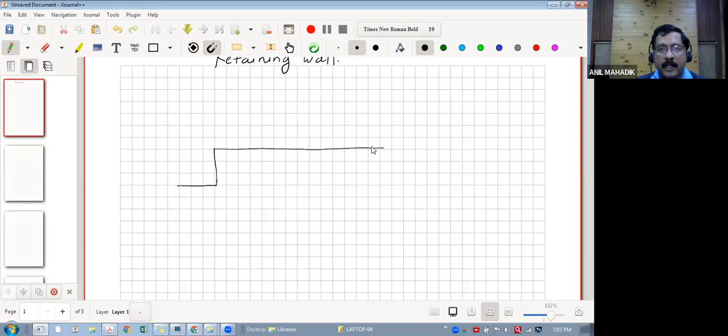Sometimes, let's say this is your road level, and it may be possible that your ground level is like this. So let's say this is your ground level, and the road level is here below. And here we are having one, let's say, building like this, for example - building or any structure, it may be industrial structure or RCC building. Such kind of situation may be there, and here this soil should not go fall down on the road area. So in that case, we will provide retaining wall here like this.

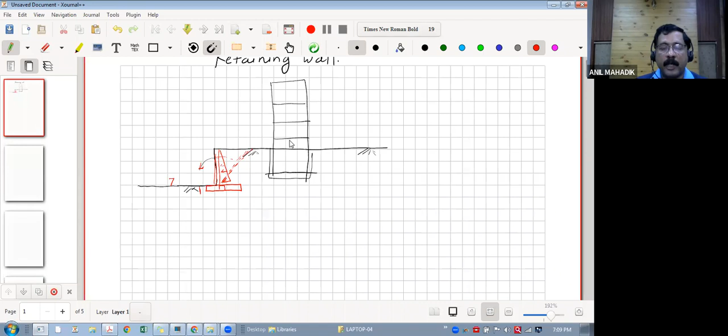So this is the reason why we provide a retaining wall. This retaining wall may be required when, say, the road level is different and the building ground level is different, or it may be something if you want to create one channel.

Underground channels are there, where the water may flow, or it may be a nala. Let's say this is your ground level, and this is, let's say, nala. Then this will be your retaining wall. So we will provide retaining wall like this. This is your retaining wall, and this soil over here, this is open area. So this soil pressure will have pressure on this wall. So functionally, you require such kind of level difference.

So when there is a level difference of the natural ground levels or finished ground levels, you want ground level over here and ground level over here. Therefore, there is a difference between the ground levels, and due to that, this soil may fall down. Okay, so this is the area. Any other example where we require retaining walls?

On hilly roads. Yeah, hilly roads, right? So generally hilly roads. If you look at this retaining wall, this is a cantilever type of retaining wall, we call it as cantilever retaining wall.

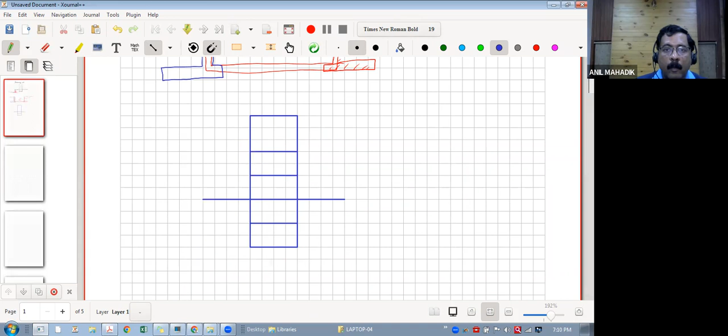Then second case may be in high-rise buildings, we may require basements. Let's say like this. So let's say this is your ground level and this is your underground basement, B1, B2, let's say. So that means this soil may fall down into this basement area, and we don't want that, and therefore we will provide a retaining wall here, right?

So the retaining wall will be like this, and definitely a base slab will be there. So this is a vertical retaining wall. Now this retaining wall is having support actually. Here, there is a slab over here, so it will offer a propping action or support in this direction. This slab will also have a support here, and as this slab is there, there will be fixity.

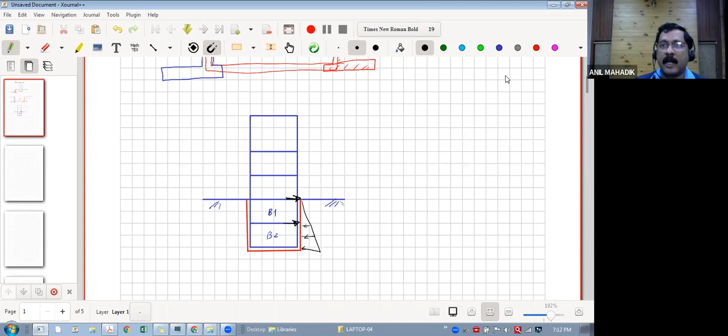So there is a lateral pressure like this, and due to this lateral pressure, there will be a bending moment. It will be something like this. So this kind of retaining wall we call a propped cantilever. Prop means there is a support at the top. It is a free cantilever - there is no support here, so it will behave like a cantilever in this case. If it tries to bend, it will bend like this, since it is a free end. Now here the end is not free because there is a support due to this slab, so we call it a propped cantilever retaining wall.

So such kinds of retaining walls are there, and cantilever retaining wall is, we can say, the fundamental or classical retaining wall concept. If you understand this, then you can apply it anywhere. In propped cantilever walls or basement walls, the only difference is in the analysis - the bending moment diagrams are different, but the design procedure is the same, and drawing and detailing is also based on the conceptual things.

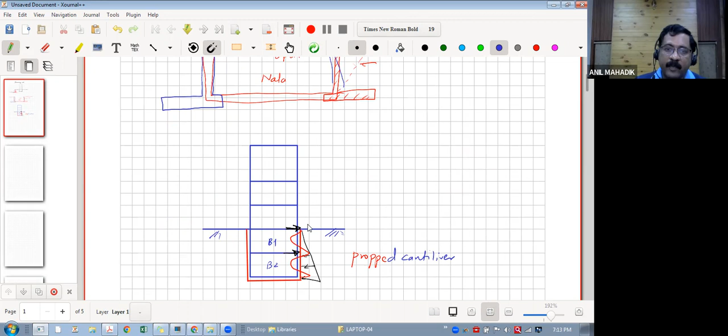So today we will learn the cantilever retaining wall analysis and design using manual calculation, so that you will understand the concepts, load path, IS code clauses, how to calculate AST and so on. Okay, so this is the way.

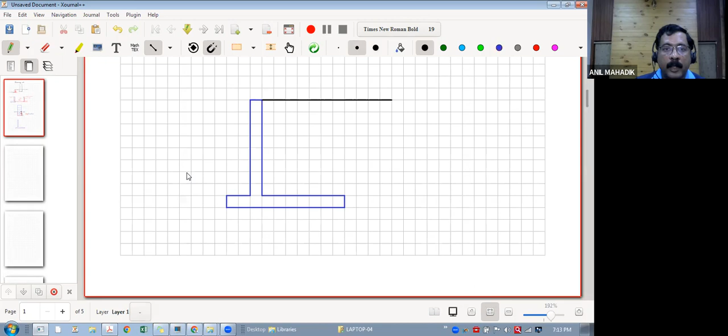And as far as the behavior is concerned, let's try to understand the behavior of a cantilever retaining wall. You should know the terms also regarding this. Let's say there is a retaining wall here, and let's say we are having some portion. So the ground level is here, and this is also your ground level. Due to this soil, there will be lateral pressure over here. So generally we call this vertical wall as a stem, and this portion we call it as the heel.

And this is your toe. Okay, these are the three terms.

Due to this soil, there will be lateral pressure like this. Soil pressure is like this, lateral triangular pressure, more at the base and zero at the top, as it is a cantilever. And due to this pressure, and due to vertical load of the soil and self-weight of the heel and toe, there will be upward pressure also, bearing pressure, similar to footings.

Upward pressure on the heel and toe slab, or bottom slab, or bottom raft, we can call it. So these are the loads acting on the retaining wall.

One is the lateral soil pressure, which is acting on the stem vertical wall. And due to vertical loads of the soil and self-weight, there is an upward pressure, upward bearing pressure, we can say.

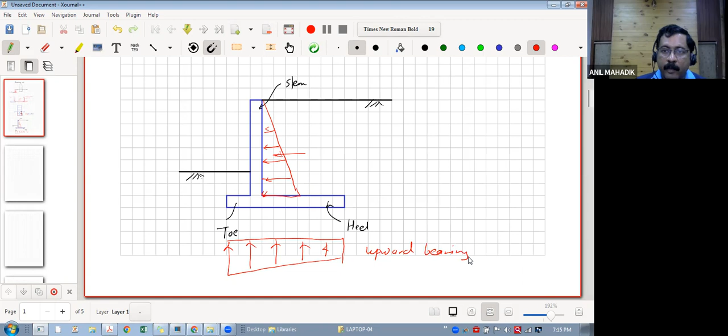Now, due to this, you understand this is a cantilever action, so the wall will try to bend like this. So you should understand the deflected shape of any structure under loads, then you can understand the behavior and tension and compression face. So this is your bending.

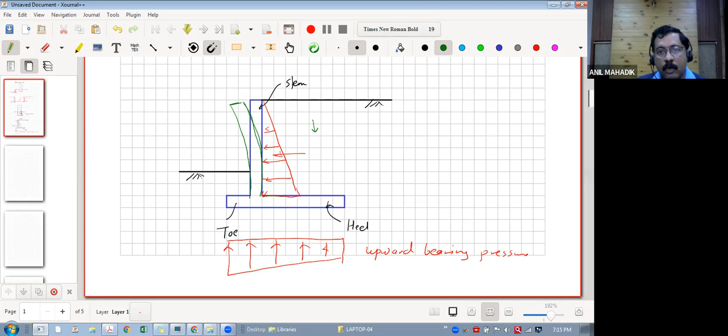Now, generally this soil mass is heavy, or we can say having more downward pressure. So due to that, actually, this will also bend like this. So it will bend also like this. So this is bending like this, this is bending like this.

Now this upward pressure is more, so this toe will bend like this. Okay, getting this deflected shape?

Due to this downward pressure, this will deflect or bend like this. And due to this upward pressure, this toe will deflect upward, because this upward pressure is more in this case. So it will bend upward, and this downward pressure is more in this case. So this heel will bend like this, and this lateral pressure is more, so this stem will bend like this.

And therefore there will be cracks here. So that means this is a tension face. Then there will be a crack here like this, so there is tension at the top. And here there is a crack here, so there is tension at the bottom.

So if you see the reinforcement, then I can say the main reinforcement is here for the toe region. And for the heel, the top will be the main reinforcement, because the bottom is in compression. And in the stem, this vertical line will have tension main steel, and the other side will have distribution steel. So are you getting the overall behavior of the cantilever retaining wall?

Yes, sir. Once you understand, then we will just see the process of design. It is as per the books actually. So the main important part in structural engineering is to understand the behavior only.

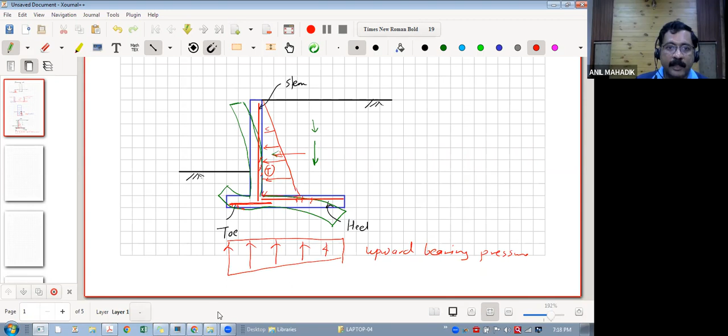Now we are taking one example similar to this only, whatever I discussed. So let's take this example only. Here is the example, and see, this height is 3 meters.

So the known part is, say, given is this. In reality, if there is a road level here and building ground level over here, so this height is 3 meters, which we know, and we don't know anything regarding this. So whenever we design the retaining wall, only the retention height is known; other things are not known.

For example, if you see this, so only I know this height. And this height is 3 meters in our case, and this is our problem. Now we want to design the retaining wall, so we need to decide this width.

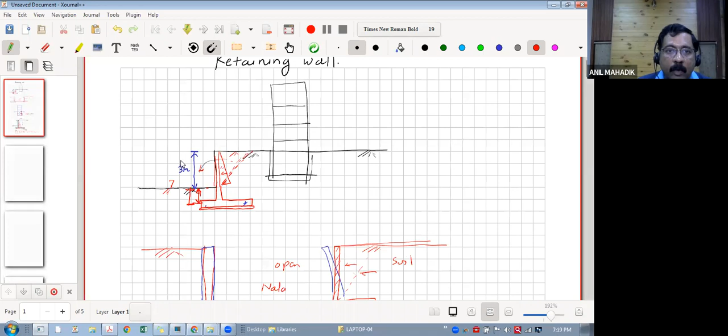Then, we cannot put the retaining wall exactly on the ground level. So generally, whenever we put any foundation, it is below the ground. Sufficient depth is there, let's say. So it should go a little down, then it will have like this. So there is a minimum depth of foundation here, from here to here. And then we can provide the base slab or raft here. So this is the 3 meter problem statement here, and we want to design the retaining wall.

So how to decide the dimension? Let's see. These are the known values: grade of concrete M25, grade of steel 500.

Cover to reinforcement, generally we take for retaining wall 40. Height of retention we know is 3 meters. Unit weight 25 kilonewton per meter cube. Soil density 18 kilonewton per meter cube, and coefficient of friction of the soil 0.6, generally we take this. Angle of repose 30 degrees, and soil bearing capacity 300 kilonewton per square meter. So this is the known data.

Now we need to decide the dimensions of the wall. Whenever we decide the dimension, generally the minimum top dimension we take is 200 mm. This dimension is clear to you now.

Then overall height of the wall. Actually this is our 3 meters, you know. This is your 3 meter. But we need to add this minimum depth of foundation.

So minimum depth of foundation, we generally calculate as DF equals Q upon gamma. Q means soil bearing capacity, into 1 minus sin phi upon 1 plus sin phi, bracket square. So 300 is our SBC, 18 is the density of soil, and phi is 30 degrees. This will come out to be DF is equal to 1.85.

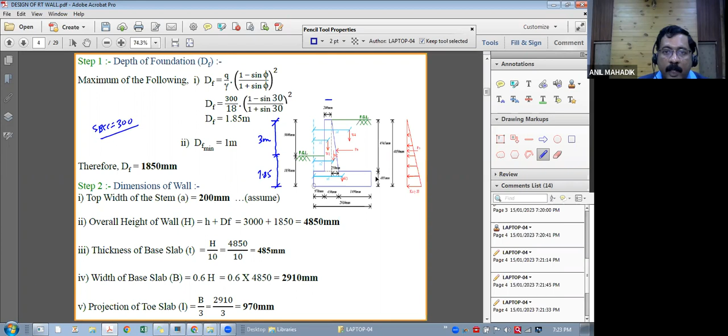So these are the dimensions we got. Top width 200, total height 4850, thickness of base slab 485, and width of base slab 2910. So let me show this, let me just increase this for the time being.

See this now: 200, overall height 4850, thickness of base slab, width of base slab 2910, and depth of foundation 1850.

Now let's go to the next step. Now the next step is calculation of pressure, lateral pressure.

So what is the lateral pressure we get? Actually, it should be here. Am I audible? Hello? Yes sir, okay. So the pressure is coming here.

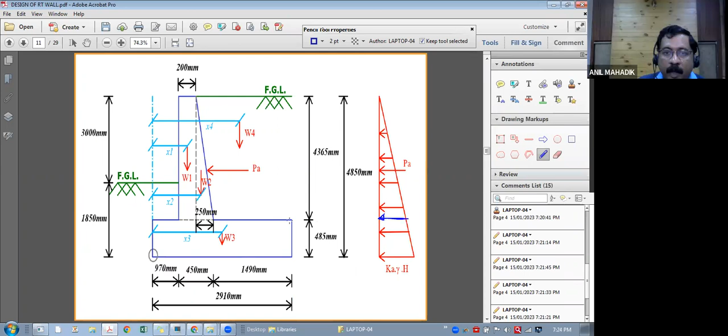See this, because this is your height of wall. For the time being, forget this. So this is the level of pressure. So this pressure is Ka gamma H. The base and the top is 0 and linearly it is varying. So this value is Ka gamma H, means Ka gamma means gamma D, now we are taking dry density.

What is dry and saturated? We have seen that in the last session, I think. And this is your H, 4.365. And this is the lateral pressure which is acting on this wall. Now let's see how to calculate that.

So lateral pressure is Ka gamma H square upon 2. Or we can see how to get that. Total area will be, see if you want to calculate the area of a triangle, so PA, total pressure, will be half into base. Base is how much? Ka gamma H, into height. So Ka gamma H square upon 2, getting this resultant lateral pressure.

And where will it act? It will act at H by 3. So this H is our 4365. So we get this lateral pressure PA, resultant pressure, total pressure, we are calculating as area of triangle. And due to this lateral pressure, there will be bending moment.

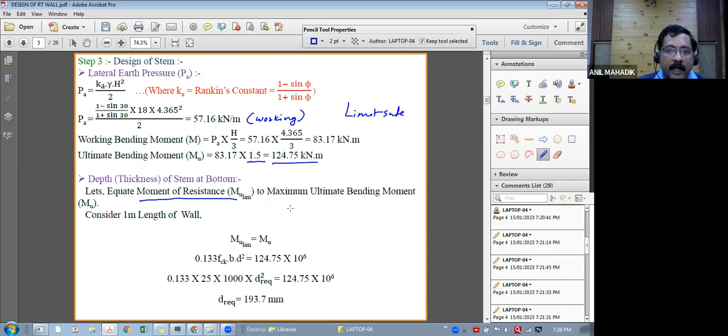Once you know the depth, then you know the moment MU, you know the depth, then you can calculate the AST. You know the formula for AST. Put all the values: grade of steel, concrete, MU, B and D.

B, generally for retaining wall, we design it for 1 meter width or 1 meter length. It is similar to slabs because the retaining wall is very long. Even though you see this section, actually the retaining wall is like this, long retaining wall. It may be 10 meter, 50 meter, whatever, and we are only designing for this 1 meter portion. So 1 meter means this dimension is 1 meter, try to understand what is that 1 meter or 1000 mm.

This is your long retaining wall, I am just taking 1 meter length of the wall. So we are designing for 1 meter only, and once you design for 1 meter, you can apply the steel for whole length. That's why I'm putting B is equal to 1000, then D square, and I'm getting this AST. Now let's assume some bars, what you want to put: 12 mm diameter.

You know how to calculate the spacing of the bars: small AST divided by capital AST, which is this. And finally, you get this spacing of the bars, so 12 mm at 125.

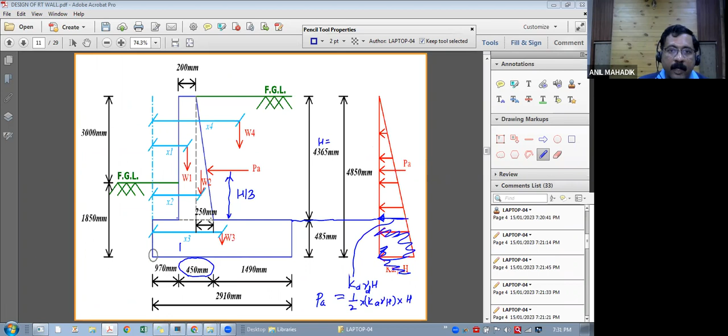Now D is varying actually in our case because it is a trapezoidal thickness. This width is different and this width is different, right? So we will take the average. This is 450 and this is 200, and that's why in the calculation we are taking 200 plus 450 divided by 2, average thickness we can say. And this is the AST minimum.

So your this value is more than AST minimum, that's why we will provide 737 only.

Now where you will provide the minimum steel? Let's assume the diameter of the bar as 8, divide by AST minimum, this one and this. So we are getting 8 mm, T8 at 125 as a minimum steel. Okay, so where you will provide the minimum steel?

Wherever there is no requirement of any steel - so this is a compression zone, yes? This steel will be my minimum steel, AST minimum, which is 8 at 125 center to center, because there is a compression zone.

Now there is distribution steel also like this. Is there any force in the distribution steel? Because it is not bending horizontally, so these are also only AST minimum. This distribution steel we can say will be minimum steel.

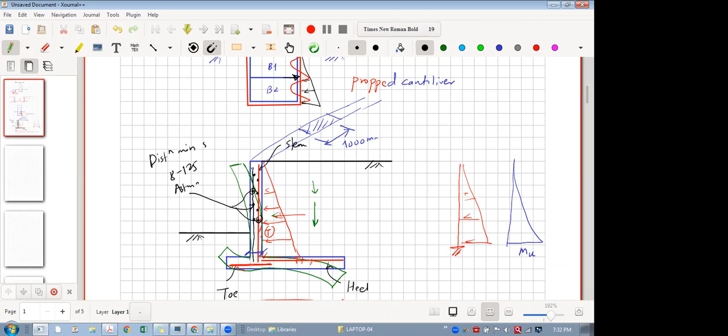Only this red vertical bar will be our 12 at 125 main steel. So this is the design of stem or wall we can say.

As far as steel is concerned, now there are other checks - development length calculations. I think all of you know LD is equal to 0.87 Fy into diameter divided by 4 tau BD. You know 0.87 into 500, diameter, tau BD value is 1.4, and you need to increase this tau BD value also for Tor steels by 1.6, so this comes out to be 600. So generally, LD is generally 55 to 65.

So if you take 50, 12 into 50 will be 600, so this comes out approximately right. Generally these are the LD values we use in practice, but the calculation basis is this. So after LD calculations, now there is a shear check.

Now where to check the shear? Generally we check shear at the D distance. So all of you know that we take shear at D distance. Let's say this is your wall, so I will take the shear check at this point.

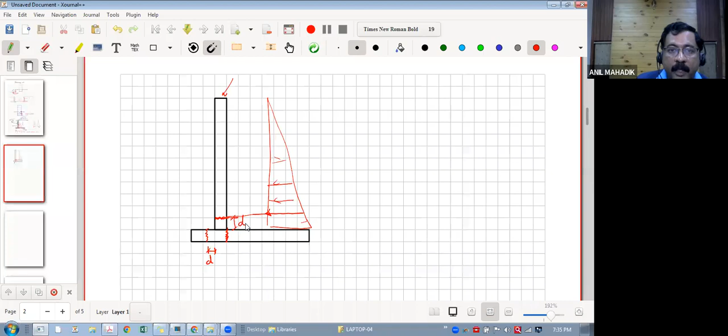So let's see how to calculate. Now we are currently doing this stem design, so what is this unit? So how to calculate - you need to calculate this. You know D provided, so you can subtract this. This is 4365 minus this D, which will be the height of the triangle. Then it's very easy actually.

And then you can get that - this K gamma H. You know this will be K gamma H, H will be this, let's say revised HR, after subtracting this D. And then you know how to calculate the horizontal force - this PA will be the shear force, right?

Yes, so K gamma H square upon 2 into 1.5 because of ultimate shear. I think you are getting this because it's very easy. So this is your shear force. Then shear stress will be V upon BD.

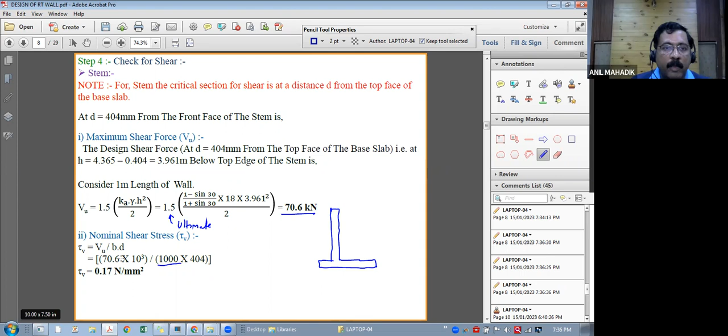B, you know, we are taking 1 meter. D is the D provided - 0.17 Newton per mm square here. And permissible shear stress we calculate from table 19 of IS 456, which depends on the percentage steel, so 100 AST upon BD. 100 AST will be the AST provided, so AST provided is 904.

Where have we provided the AST? Here, AST provided, right? So we are taking the 12 mm at 125 upon BD, so 0.22%. From the interpolation from this table, we get the tau C value as 0.336. And that means tau C is more, permissible stress is more than the actual stress, so that's why it is safe.

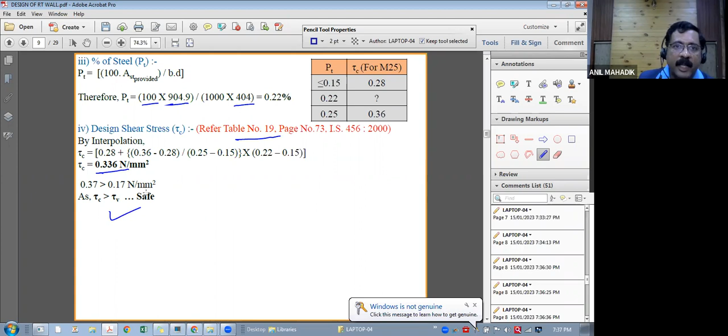So generally in retaining walls, the shear check is satisfied, similar to slabs. So we need not design any shear for retaining wall actually. But yes, for the curiosity or for the process of design, you should follow this.

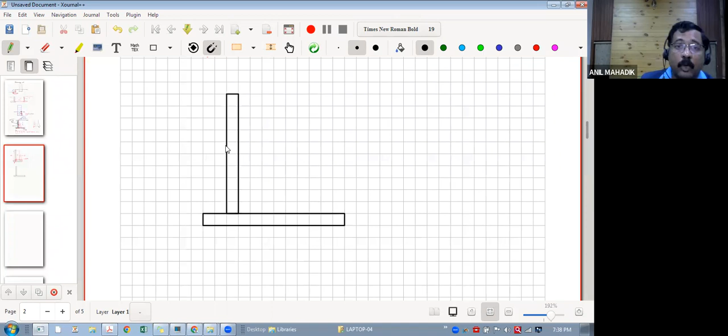Now, actually this step should be first. I've given here step 5, but actually the stability check must be taken first, before the design of the wall. Let's see, if you look at the retaining wall, what do you think? How will it fail? Fail or collapse - these are different things. Fail may be design failure, and collapse means stability failure. Do you know what collapse means? If the structure is not stable, then it will collapse. Unstable structure.

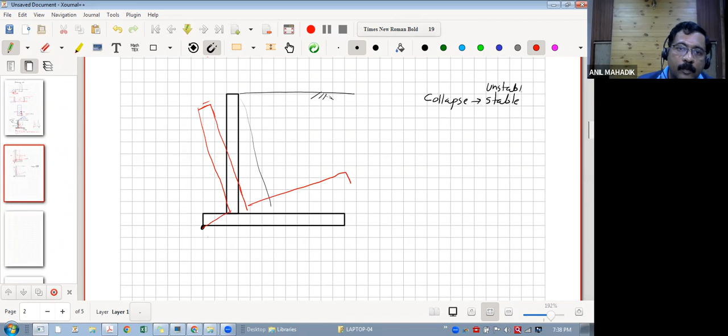So you know that there is a lateral pressure over here due to the soil. What will happen? Due to this lateral pressure, this wall will try to rotate or overturn about this point. It will be something like this. It will overturn, yes or no? Is it convinced? Yes sir, yeah, so it will overturn.

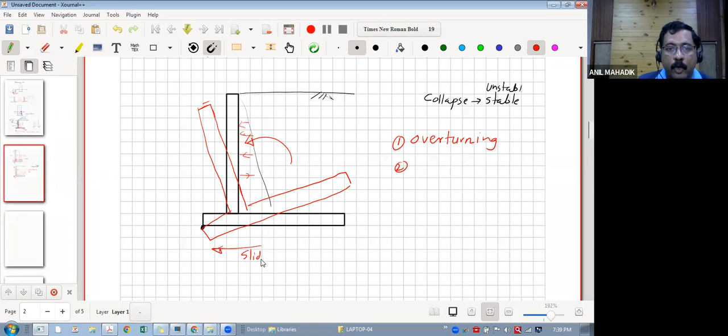So overturning means you should check the wall for overturning - the wall should not overturn. So overturning is one of the stability parameters. Second, due to this lateral pressure on the wall, this wall may also slide, because the sliding force is this force PA - this wall will try to push the wall here in the horizontal direction and it will slide. So there is a sliding check. These are the two stability checks.

So before designing any wall or slab, you first check the stability and then you can go for the design, because we cannot analyze and design an unstable structure. So first it should be stable. So how can I say that it will be stable?

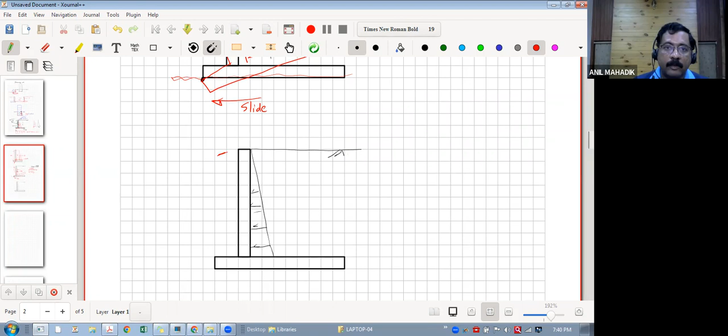So you see here, once the force is applied and it doesn't overturn, then what will happen? It will not overturn, but it may bend. So there is a difference between stability and bending or deflection. Please try to understand - let's say this is your stable structure. You have taken care that it is stable. And now there is a horizontal pressure. What will happen to this? It is stable, but it may bend. So whenever I say it may bend, it is deflecting or bending like this.

It is also deflecting or bending like this. That means this point is now working as a fixed support or anchored here. That means it is made such a way that this will not overturn like this, but yes, it may bend. That means this is my stable structure - I can analyze, calculate the bending moments, and design the structure like this. So how to check this overturning and sliding?

Let's see. So who is causing the overturning and who is stabilizing this? Why is it overturning? Due to this lateral pressure, right? And where is it overturning? About this point - if it overturns, where will it overturn? About this point. And that overturning is due to this PA into this distance, whatever may be the distance, PA into X. So overturning moment will be PA into X, where PA is the horizontal resultant force.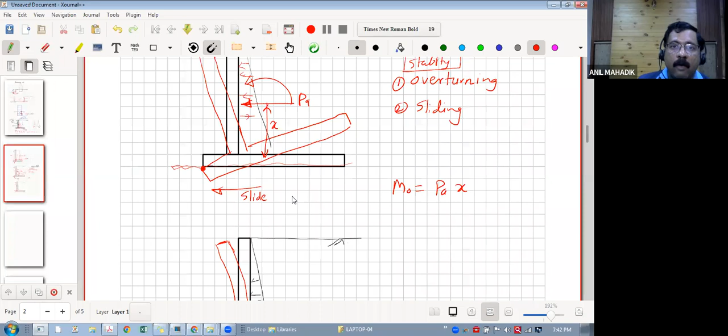Now, if the structure wants to be stable, if you want to avoid this overturning, who is resisting this overturning moment, or who is stabilizing this moment? Sir, the weight of the structure. Yes, so there is a weight of the soil over here, then there is a weight of the base slab, the heel slab. The toe will not have much, but okay, there will be like this. And this stem weight is also there, right?

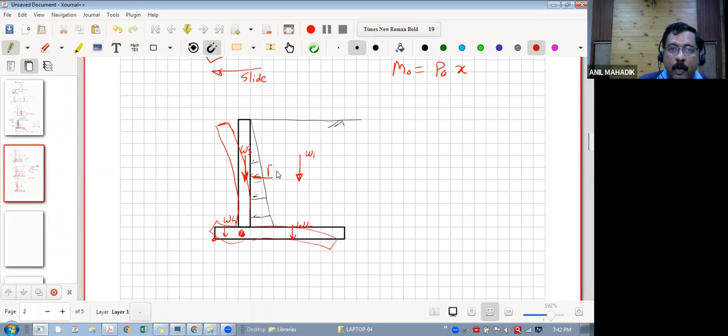And about this point, let's say this is your W1, W2 - I don't know yet, before study. So who will stabilize? Overturning moment is PA into vertical distance, let's say small h. So overturning moment is PA into H, and the resisting moment or stabilizing moment is this W1 into this distance, CG of this rectangle, then W2 into this distance, CG of the base slab, and W4 into this distance, W3 into this distance. From the overturning point, we will measure the centroid of all the rectangles, and the summation of all these moments will be the resisting moment. We will see how we calculated that.

So this is W1, W4 - sorry, now in this, W4 is for the base slab, it is W3, and W1 is for the rectangular portion of the wall, and W2 for the triangular portion of the wall. PA is the horizontal resultant force. So how to calculate W1? What is W1?

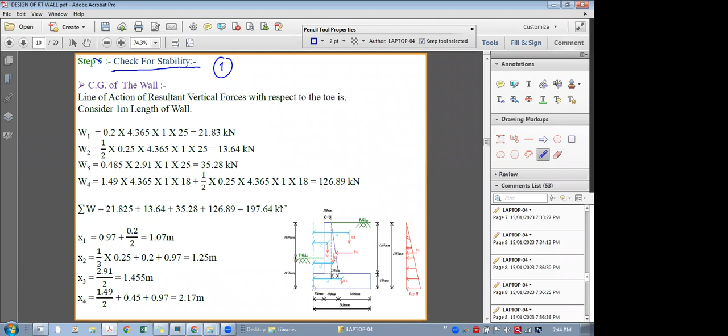So this rectangle, width into height into density into 1 meter. Yes sir, width into height into 1 meter into density. That is the total weight of the rectangular wall.

Then W2 means triangular wall weight, so you know half into base into height. W3 is the weight of the base slab, so you know this 2910 into thickness of the base slab into 25.

Now W4 is, I think, soil pressure. So W3 we have seen, W3 is the base slab weight, and W4 is the soil weight here, this soil weight. So this width into height into density of soil, you know, it is 18.

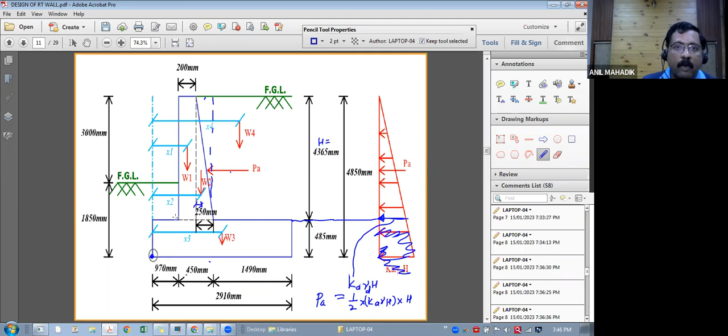Okay, so this is actually geometry. You know how to calculate the centroid of any rectangle or triangle. So in this fashion, you can calculate the centroid and then you can calculate the resisting moment. So X1, X2, X3, X4 are calculated here.

And finally, the total moment will be the summation of all the moments. These are the resisting moment W1, 2, 3, 4 into this distance, minus PA.

So let me show here again. So you know this into X1, then this into X2. See this one. W1 into X1, W2 into X2, W3 into X3, all summation will be the resisting moment minus horizontal force into H by 3.

So total moment will be how much? 283. Okay.

Now there is a second check here. X bar, moment, total moment divided by total weight will be 1.4. Generally we calculate the eccentricity. Eccentricity is B upon 2 minus X bar. X bar, you know, is total moment divided by total weight. And you calculate the E by this formula.

You get this E, and for no tension. So actually there should not be any tension in the retaining wall. Retaining wall means soil, tension in the soil. So try to understand, no tension means no tension in the soil. So E should be less than or equal to B by 6.

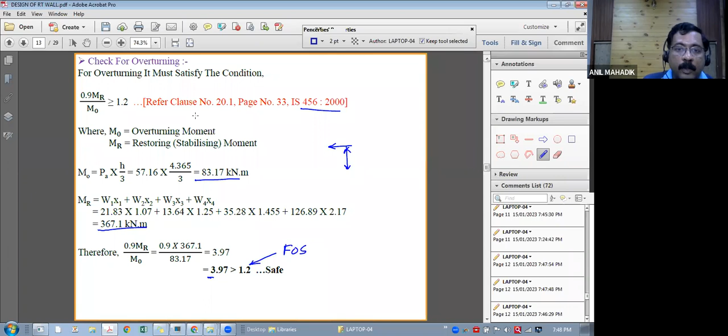This is 83.17, into MR divided by this. So the overturning factor of safety is 1.2. This is factor of safety as per the code. So your factor of safety should be more than this 1.2.

Then sliding check. Sliding check also, frictional force upon horizontal force should be greater than 1.4. So what is the frictional force? I think all of you know how to calculate the frictional force.

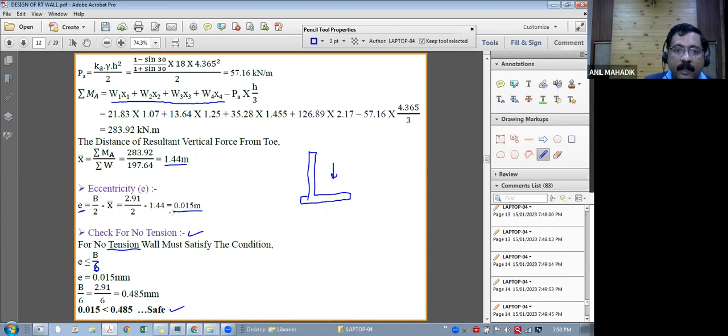See, there is a pressure like this due to this moment. There is a vertical load downward due to the soil, due to the weight of the heel and everything. So there will be P upon A. This pressure will be on soil. And due to this moment, overturning moment also, there will be plus or minus M upon Z.

So this is your bearing pressure on the soil. And that value should be less than SBC, yes or no? So there are two pressures.

One is the sigma, which will be P upon A plus M upon Z. Whatever value it comes, it should be less than SBC. There is a second case, P upon A minus M upon Z. It should be more than 0, so there should not be any tension, no tension.

Correct? This is the simpler understanding, and now we will see.

The books have developed this formula, sigma max. So I have shown that sigma max, first one was the sigma max, and this is sigma min. So sigma max is, they are just doing this. Z is BD square upon 6.

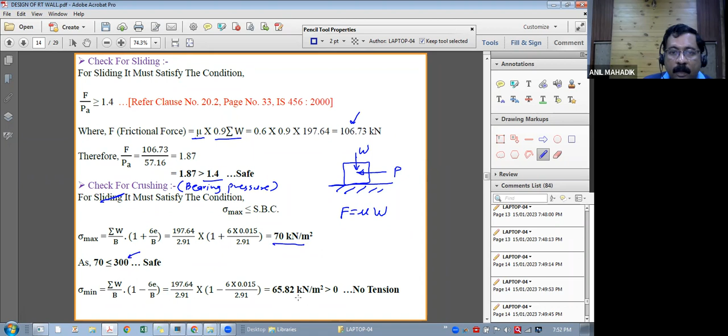So they are rearranging the formula, and they have developed this final formula, sigma W upon B. So sigma max will be 70 and it should be less than SBC. So here it is less than SBC, and then sigma W1 minus sigma min should be more than 0, no tension condition. So stability is satisfied now. I think it is clear till now. Yes sir, so stability check is done.

Now let's go for the analysis and design of the base slab.

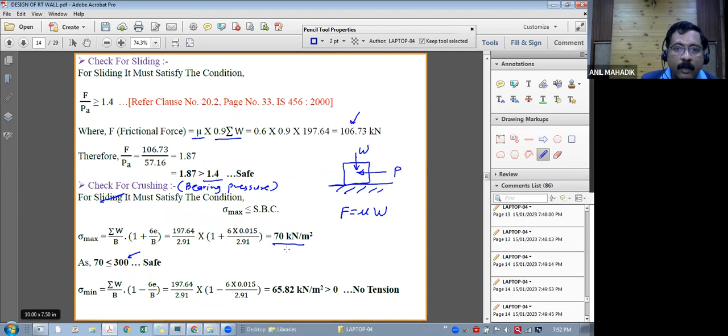So now we have calculated the sigma max here. You can see the pressure at the base. Whenever I say this, this is nothing but the pressure in the soil. Sigma max, sigma min we have calculated here in the stability check, over 70 and 65.82.

And you know this horizontal force also, so there is a K gamma H over here, which is required for our this calculation at this level. Now you have all the forces in the diagram.

Now if you see this right portion - have we taken the toe first? Okay, we'll take the toe. So in the toe you see this is the portion which is upward, which will try to deflect this toe like this, right? So the pressure on this toe is this. So if I consider this toe as a fixed cantilever like this, let's say this is your toe dimension, 970. Here 970 is yours, this fixed.

And what is the pressure coming on the toe? Yeah, this is like this, this portion, this only zone. And this will bend that - yes, bending always. So you can calculate these pressures through interpolation, because you know this is 70 total, you know this is 65, then you can do the triangles and rectangles and calculate these pressures.

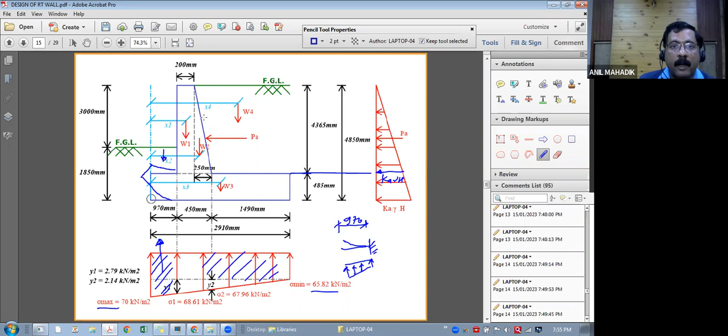This is for toe, let's calculate the moment on heel. So heel, who will cause the moments? So this pressure diagram here, this one. Similar to toe only, but in this case the downward pressure is more. So W4 into this X, whatever distance is there, then toe and then upward pressure. So once you do the calculation, you will see that the downward pressure is more, and that's why it will bend like this, and that moment, let's calculate.

So here you can see heel slab, WH 1, 2, 3, 4, U2, here it is given. And finally we are getting the moment HU as 51. Tension at the top, because it is deflecting downward.

Now, how to calculate the depth required? You know, moment of resistance into moment, design moment. So you take the maximum of the toe and base slab, because both are same actually, right? Toe and base, I want same thickness, right? So that's why I will take the maximum moment out of this heel and toe, and where I will equate this and I will calculate the D. So all other formulas are same. Then calculate the AST minimum by this 0.12% of the width into thickness of - it should not be wall, it should be base slab.

AST minimum, then AST design by this formula, and finally you provide the maximum of the two. So in this case, AST minimum is governing. Let's assume 12 mm diameter, and calculate the spacing of the bars. I'm not going in detail because you have already learned how to calculate AST and all this.

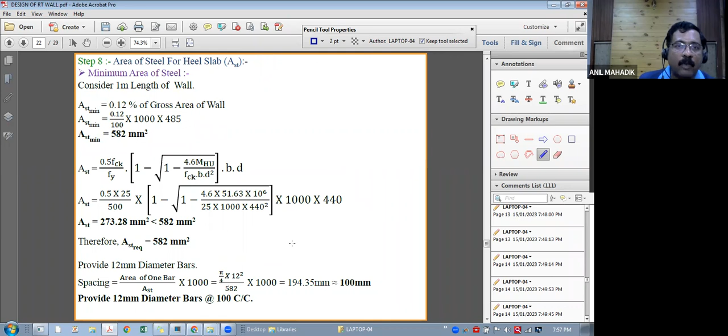Then heel slab calculation, same process, AST minimum, AST design for heel. And distribution steel, again same thing. Then we can check the shear.

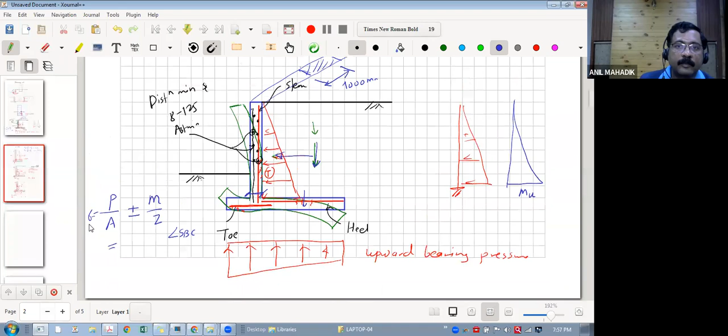Now, I've already told you that for the toe slab, the critical section is at a distance D. Here we have seen where to check this. Critical sections - this is your toe, so it will be at a distance D. So whenever you calculate the pressure, this is your diagram, you will take only this zone. This area of the diagram will be the shear force, which is given here.

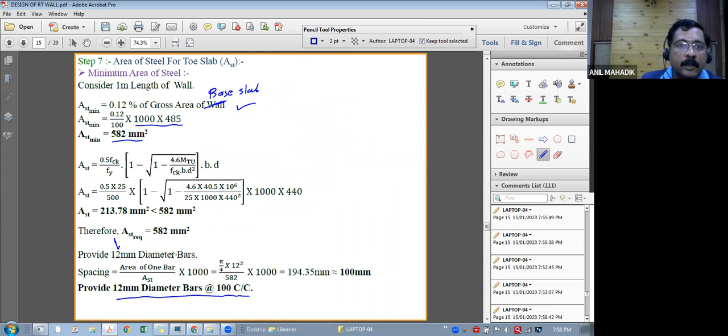Here also, till this point - let me delete this now. I know that this will be my shear location, and the area of this diagram will be the shear force. So how to calculate this ordinate? By interpolation. Finally you get this - by interpolation, shear force will be the area of the diagram, which is 55 kilonewton.

Then shear stress V upon BD. Then PT, percentage steel provided in the base toe. And finally, using this interpolation, you can check whether tau C is greater than tau V.

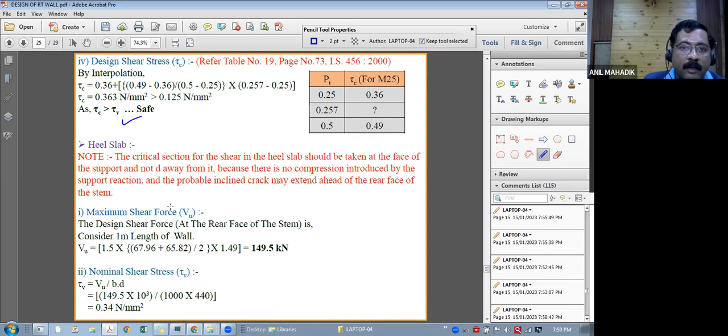It is safe. For the heel slab, the critical section is at the face of the support. Same thing, only it is at the face. So the total diagram area will be this at this point - this is your shear location. Calculate that by interpolation and then check the stresses VU upon BD, and check tau C greater than tau V.

So this is the heel. You know these tables, Table 19 in IS 456, for AST minimum, and this is your final diagram.

So here you will see that this is your main steel, which is T12 at 125. Whenever you do that main steel, it should go down like this, and there it should go from here to here - it should be LD, minimum LD. So if it is 12 mm diameter, how much should it be? It should be something like 600.

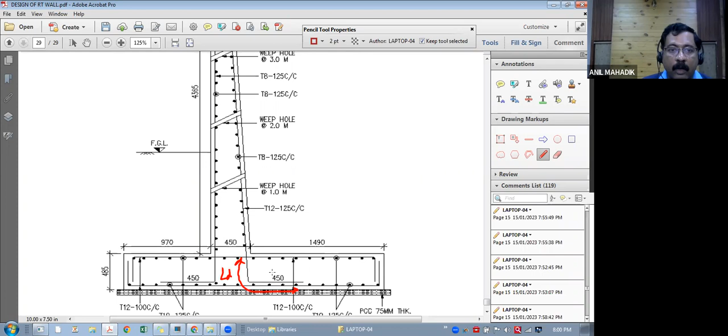We have already calculated, right? Currently we have given a little more. You can take it as 485 minus cover, so let's say 400 plus 200. This can be 300 also, or you can provide more like this. So this is the LD.

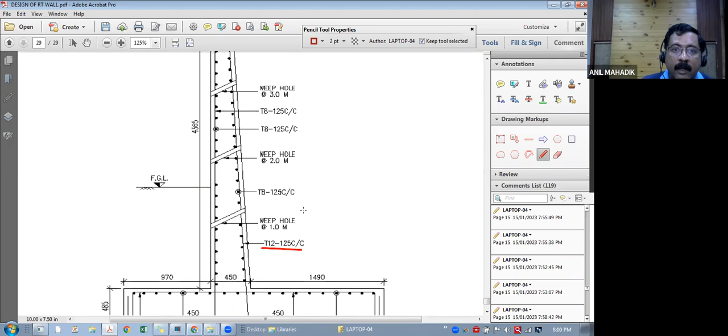And this is the main steel. All other steels are AST minimum, 8 at 125 - this 8 at 125 distribution steel, dots, and even vertical steel also 8 at 125. Only this is the main steel, because the tension face is this. I hope you got this.

Now, second point is the heel slab and toe slab. So we have calculated this comes out to be 12 at 125, 12 at 100, I think - so this is your 12 at 100. Now, we generally don't separate out the heel and toe, because the toe dimension is very small, so it is better to continue these bars till the end - from this to this end, and then make it L here and L here.

So we don't separate out this steel, just keep it ahead. Now for the toe, whatever steel is coming, we will continue in the heel slab, because this dimension is generally very small - 1 meter, 750, 800 - no need to unnecessarily complicate the design. And then these dots are nothing but your distribution steel, 10 at 125.

This L is important and this L is important - this is the critical point in the design. These two dots, if you want to avoid, you can avoid also - there is actually no reason for providing these two dots.

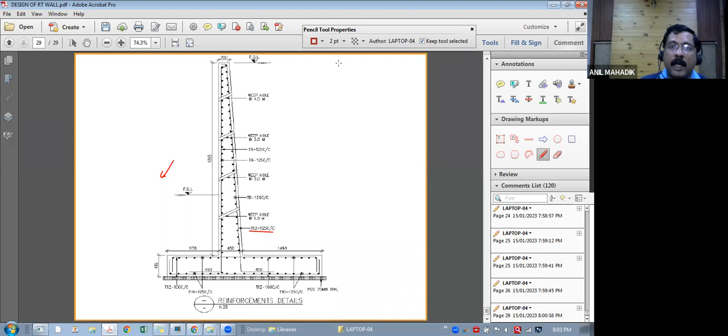There is one more point - you need to provide the weep holes. So generally, if there is no problem here, let's say it is a road area or there is no structure in this zone, then you can provide the weep holes so that there will not be any water pressure. So currently we have designed the retaining wall for only soil pressure, which is gamma D, K gamma DH. But during the rain, there is a possibility that there will be water here, and then there will be additional water pressure, gamma W into H.

So if you don't provide these weep holes, then add the water pressure gamma W into H. Gamma W is 10 into H, whatever H is there. K you can calculate by formula. Dry density is 18 into H. And if you don't want to create any water pressure in this retaining wall, then you can provide holes so that water will go down and outside, and the pressure will be released for the waters.

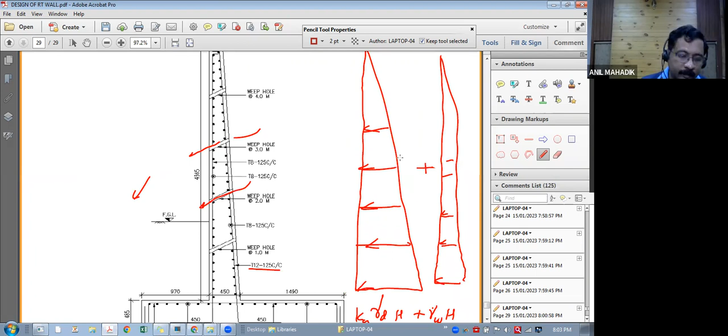Even for the safer approach, because in rainy season definitely the soil will be saturated, instead of this gamma D, you can think of providing gamma saturated also. Gamma D is 18, and gamma saturated is 20 kilonewton per cubic meter. Such kind of conservative approach can be taken because it is more practical, I think.

Now the process of designing of retaining wall is easy actually. Once you understand this, the problem may be there regarding practical issues, like as I told you, if there is water here, then you need to design for the water pressure. And if you want to release the water pressure, provide this kind of holes.

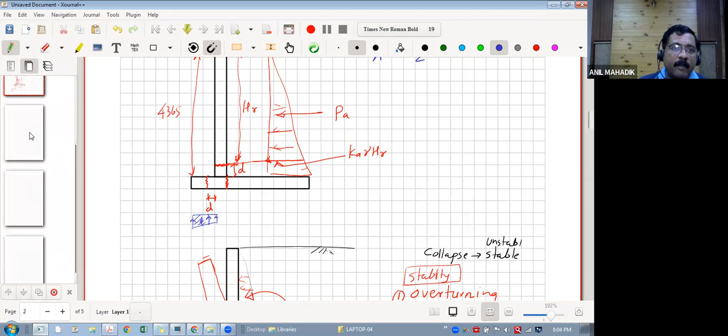Now there is another problem, second problem maybe, as I told you, the retaining wall is there, but there is a prop. So there is a slab over here, like you know that you have designed the water tank, so you may be knowing that. Let's say there is a retaining wall like this, but yes, there is a slab also here, maybe due to the building. Now in this case, the philosophy is same, the pressures are same, forces are same.

The only boundary condition is changing. Instead of free, it is now propped. Or propped, we can assume generally as simply supported. So if I draw the loading diagram of this structure, then it will be fixed at the base, and there is a pinned, or better to show like this. Then we have a pressure here like this.

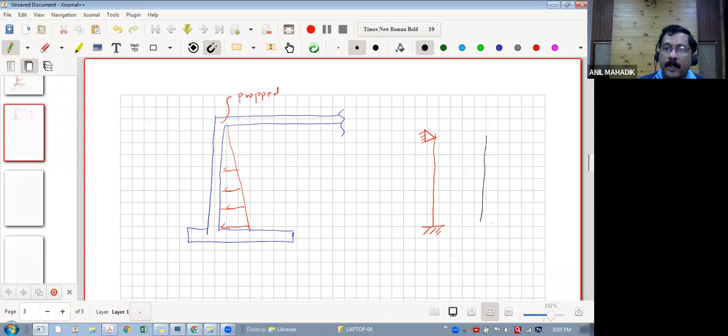And we will have a bending moment diagram. So the pressure is from here, so the negative moment will be here, so it will be like this. For pure cantilever, it was only on this side only. So if this is the case, we get this moment, let's say hogging moment here and sagging moment here, positive, negative, whatever. So you need, now there is tension in this face also.

Now the main steel in this case will be here also. So this inside steel you will design for MH, and this outside vertical steel you will design for MS, and the dots will be distribution steel. There's no problem. So such kind of, now the difference is only in the boundary condition, and due to that the analysis is changing, moments are changing, right?

But all other design philosophy is same. Calculate moment of resistance, AST minimum, AST 0.5 FCK formula, then shear check, everything is same. The only analysis is different. So many times in structural engineering, actually design is easy. The more important thing as a structural engineer is to decide the boundary conditions, then to analyze as per the boundary conditions, to design as per the analysis, and to detail the reinforcement as per the assumptions done at every phase. So that is the critical point.

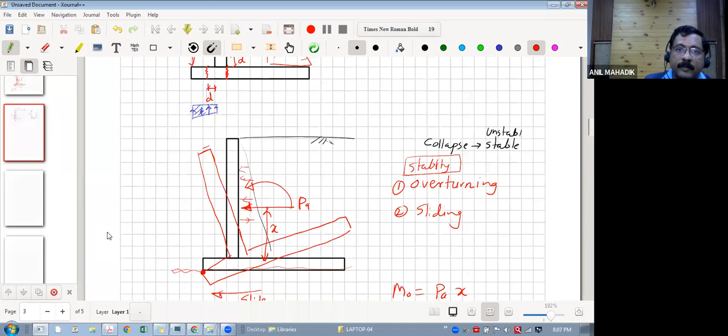Second case may be, I told you previously, when there are basements. Two basements are there, then you can draw the loading diagram like this. This is fixed at one end, there is one prop over here, one prop over here, and there is a triangular load.

Due to that, there will be a bending moment like this. If you assume this as simply supported at this end, there will be MH1, MH2, MS1, MS2. You can do curtailment to optimize the steel. If you don't want to optimize, take the maximum of MS1 and MS2 for this side steel, and maximum of MH1 and MH2 for this side steel. Or if you want to curtail as per floor height, you can. Design this floor for these forces, and design this floor for these other forces.

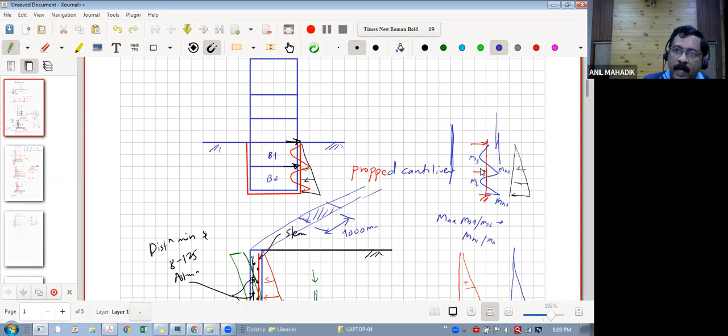Generally, value engineering or optimization can be done this way. As a beginner, you can go for the conservative or safer approach. But as you gain experience, or if you have a senior to monitor your calculations, you can optimize the steel also. So this is one case in retaining walls.

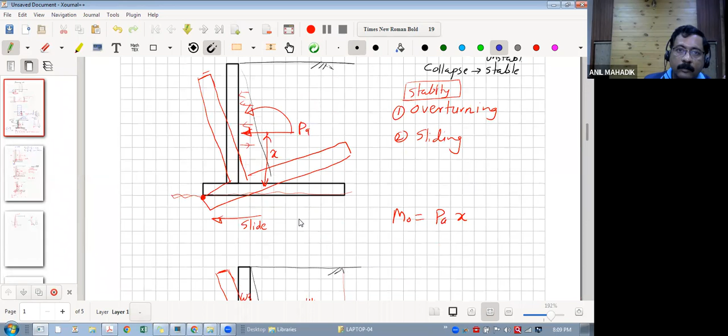Then what else we get? Okay, so any questions?

Sir, in case of sliding, if it fails the sliding criteria, we can provide a shear key also. Yes, shear key, somewhere you can provide. Yes, you can provide a shear key like this, it will be something like this.

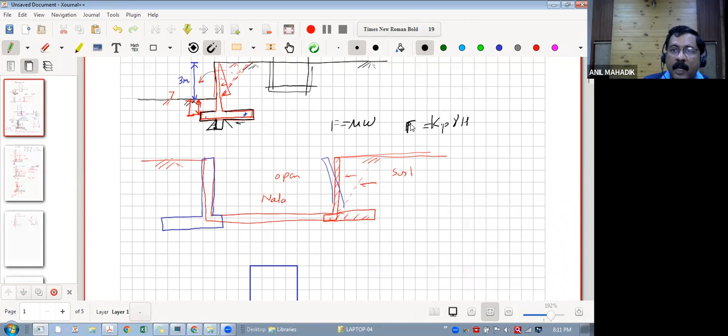So whenever you calculate the resistance, you have calculated mu into W, right, frictional resistance. There will be additional resistance here. There is a lateral pressure, isn't it? This will be passive pressure, and passive pressure will be KP gamma H. So from here you can take this height and calculate the resistance due to passive pressure, and add that in your calculations. Understood? Yes, it can be done this way.

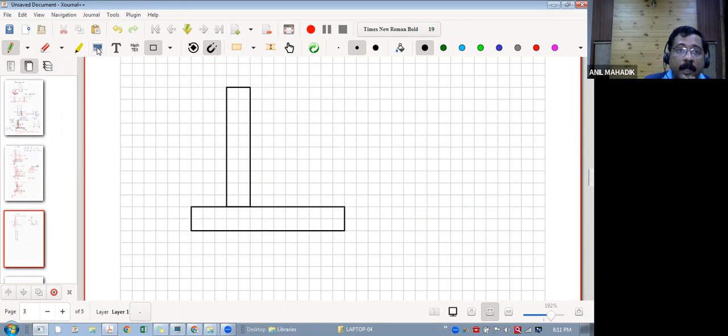And then detailing also has to be done properly. Once you understand the design philosophies and design procedures, the main focus must be on the drawings and detailing. Don't forget, because finally those drawings are important. If you don't do the detailing correctly, then your analysis and design has no value.

The shear key you can detail out like beams also. Different consultants use different philosophies, but the overall design is, so you can provide it like this also, like beams, and then you will provide the dots here. This way also you can detail it out, with this side face. Or there is another possibility, let me draw this first.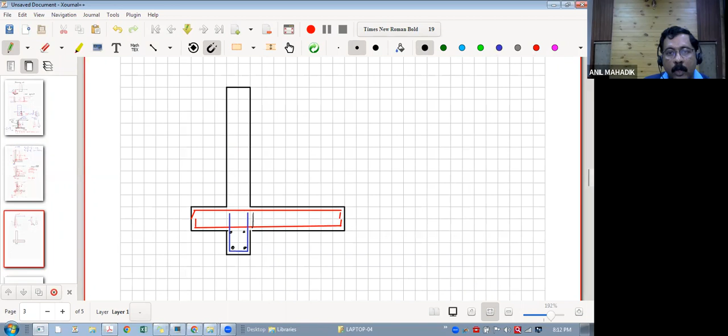This is your top steel, this is your bottom steel with EL. And you can provide U bars also. Do you know what a U bar is? U bar is like this, like this. No need to provide stirrups, just this one, and then dots. This way also you can do it. But you must make sure that this total depth is LD, from here to here. And if the LD is not satisfied due to the vertical bar, then you can do EL like this. So if there is no sufficient LD, you can provide LD like this plus this. So these are the detailings of the shear key.

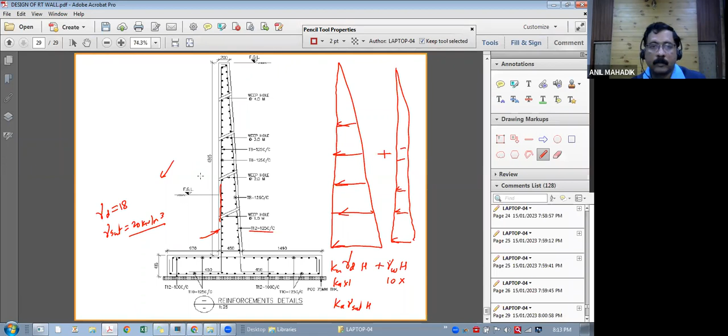Yes, any questions? No question, sir. Okay.

So practice on this. First of all, develop your design procedure, and then think of the different practical problems. If you have any practical problems, share with me, I will give you the solutions. See, whenever I give solutions, it is my opinion, but there may be many solutions for the same problem. So try to understand, there will be an exchange of thoughts.

Now, I hope many of you have already joined the training course, and the design thought process is clear to all of you. Now we will have discussions with respect to practical problems and different opinions. So those who are freshers, I don't know if there are freshers, but those who are quite old, from B1 batches, they can ask me any questions regarding practical issues also, maybe on the technical forum group. So if the questions are over, we can close today's session.

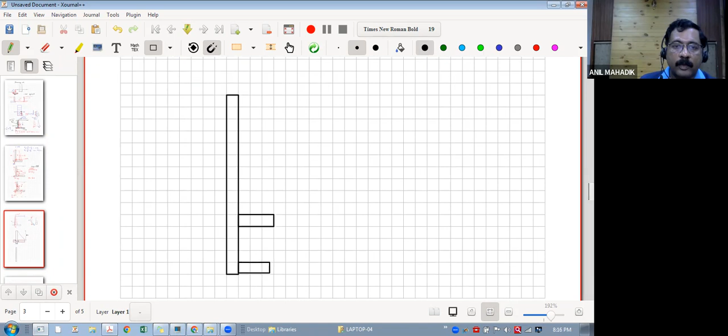So such kind of counterforts may be there, like this. Then the overall bending moment gets reduced. Counterforts, all of you know counterforts, what is a counterfort? Yes sir. Counterforts, if this is a retaining wall, let's say in plan I'm showing. If this is a retaining wall in plan, then we generally provide such kind of counterforts, in plan, I'm just showing in plan.

Now, in this case, the bending is not vertical only, but there is a horizontal bending also, like we say for water tanks. So the section is same. Let's say this is your section.

In this case, between these two, counterforts are acting as supports. So if I draw the loading diagram, the counterfort is nothing but your support, like props or supports, whatever.

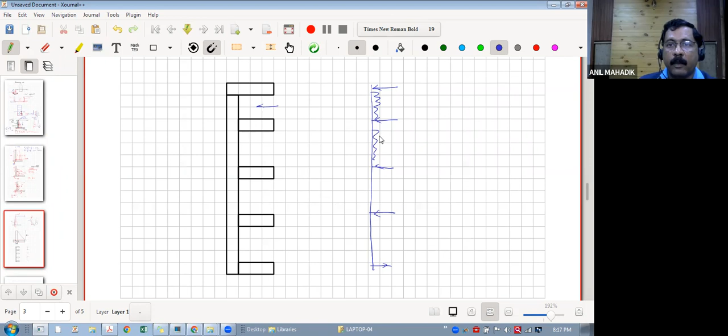And you know that there is a soil pressure, which is coming from here. So it is better I show the props in a different direction so that it will be sensible. So these are the props. And there is a horizontal pressure here due to the soil pressure. And then there will be bending moments.

Continuous beam, similar to a continuous beam. There is no other. Okay.

So this is the horizontal. That means definitely it will have a vertical bending moment also, but not for the full 6 meter height. Maybe generally h/3 we take roughly. And if you want to go for detail, then you can go for static analysis for this. But roughly as a manual calculation, h/3 is a good number which you can calculate for this vertical moment.

And you will provide the steel over here for vertical moment.

Now horizontal moment you can see here. This is the horizontal moment inside, MI, let me say MI. This is your M outside. So whatever MI is there, it is a horizontal moment, right?

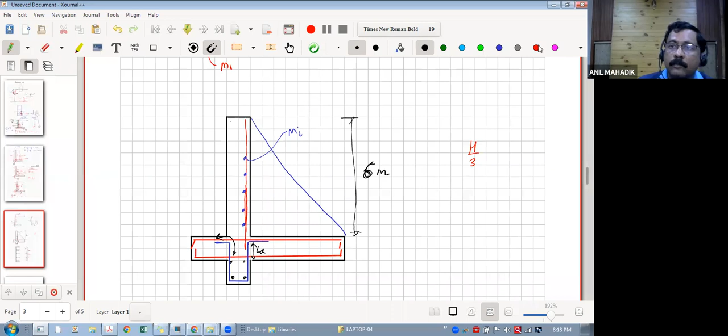That means MI, I will design here in the form of dots. I will calculate the steel for MI, inside moments, horizontal moments, MHI. And M outside will be these dots.

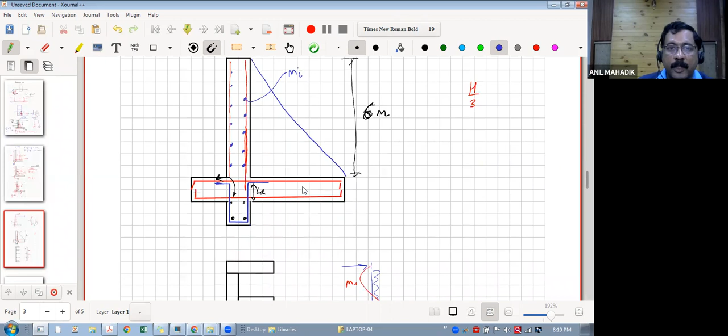Now, what have you done? Instead of having a full vertical cantilever of 6 meters, we have given these supports like counterforts. And due to the counterforts, the behavior got changed. So instead of full vertical moment, now it is partly vertical moment till this height, let's say h/3, and partly horizontal moment like this.

So we have distributed the load path in such a way that the behavior got changed. The forces got distributed in all directions. Previously, what was happening? Only there was a vertical bending moment and deflection like this. Now it will deflect horizontally also. So the wall will deflect something like... how will this be?

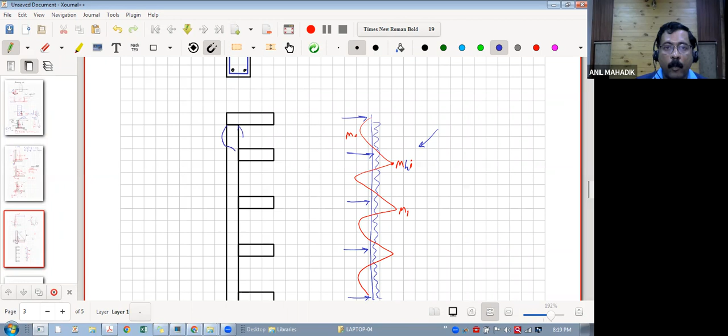Similar to bending moment, almost, right? So this is your bend deflection. In a cantilever wall, what is happening? Do you find any horizontal deflection in cantilever walls? No. In plan, the wall doesn't bend like this, the whole wall. It will deflect like this. So now this is the way we can control this.

Now you can go for 7 meters, 8 meters also. And for larger height, again 8, 9, 10 meters, then there are special walls. People are designing, I think, in bridges people are using geotextile walls. I will show you the concept, but I have not designed such heavy walls myself. These are required in bridges generally, not in other structures.

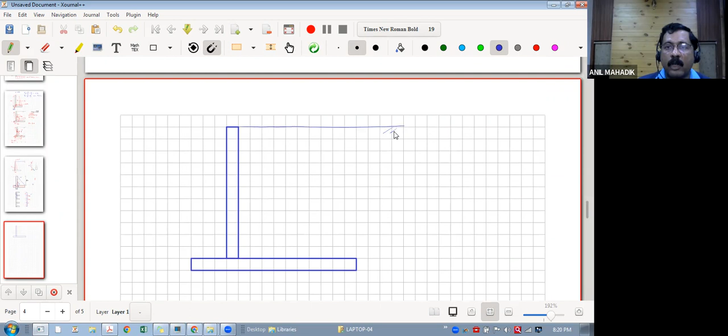So all of you know why the retaining wall is getting deflected due to this. There is a shear plane here, and due to that this soil mass is exerting pressure on the wall, and that's why there is a lateral pressure of the soil on the wall.

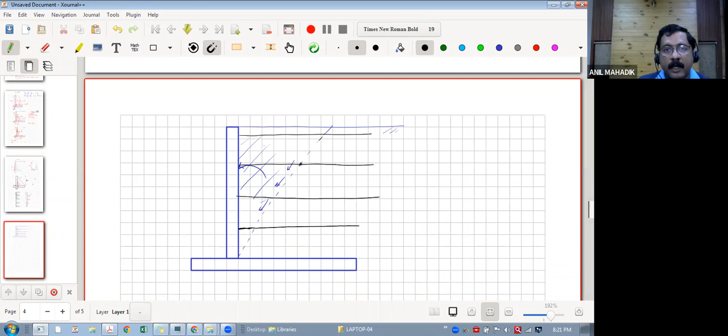You know this. Now what they do in that, generally they provide geotextiles here in the horizontal direction. Geotextile means it's kind of a prop, we can say. So this kind of geotextile will be there at a certain height. What happens due to this geotextile? You see, this plane gets cut over here.

And due to that, whatever I am saying, the horizontal pressure gets converted into downward pressure. So instead of horizontal force, it will have vertical force. That means this load is going directly downward. Similar to here, in this zone it is downward, but after this shear plane it is horizontal generally. But if you provide these geotextiles, then it will go downward. And so there will not be any pressure on the wall. And due to that, the thickness of the wall is generally less, even though the height of the wall is more.

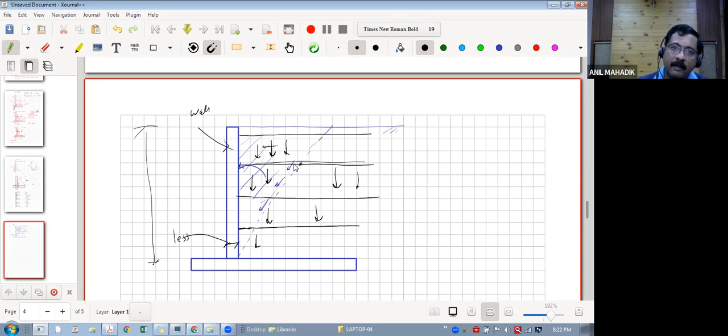You might have seen this. So there are some innovative retaining walls generally done on bridges, which may be 9 meters, 10 meters, 8 meters like this, or even more than that, like dam kind of structures.

Okay. Okay. Okay. So thank you all.